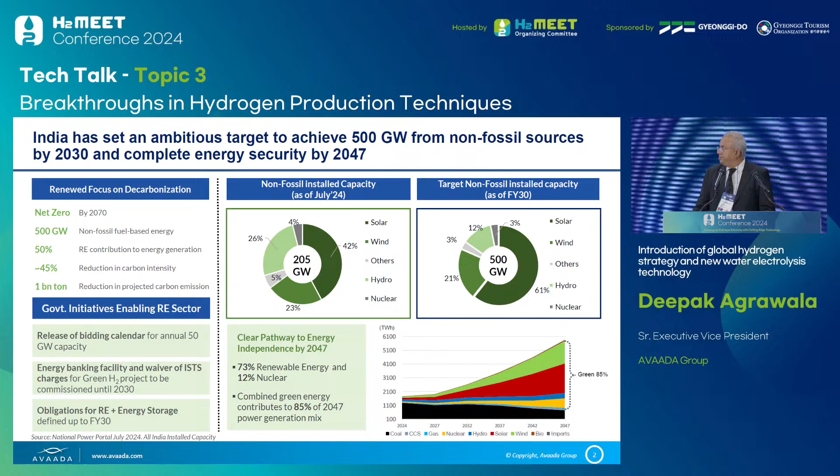A very important and unique feature that makes India one of the preferred low-cost destinations for production of green hydrogen and green molecules like ammonia is India's large and single unified transmission network. Until 2016, India used to be divided into 5 different regional transmission grids, but post 2017, the entire country has one single grid at one single frequency.

This allows us, as players and producers of electricity, to transmit our electricity over long distances to our green hydrogen and green ammonia plants. As a policy, we have also received an incentive of waiver of interstate transmission connectivity charges. So one single grid, one single frequency is one of the very unique features of India, and there are very few countries in the world with this distinction.

Not just in terms of transmission capability, but even in terms of availability and congestion, there is hardly any congestion in the grid, and the network is available continuously over 99.5% based on a last 10-year track record.

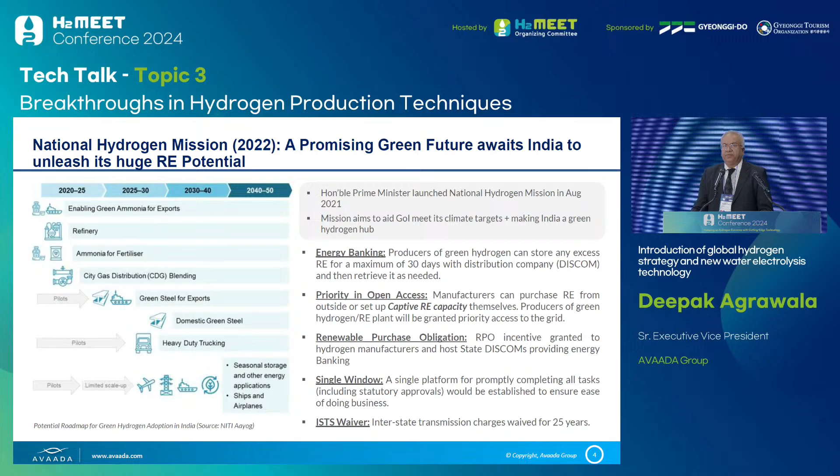The second important policy announcement is on the single window clearance and ISTS waiver. Effectively, once our projects are operational before 2030, we will get a waiver of interstate transmission charges for a period of 25 years. Both these policy announcements have set up an enabling environment for India to become one of the lowest cost producers for green molecules.

The Green Hydrogen Mission launched last year has given a clear target of about 5 million tons of green hydrogen production by 2030, which would incrementally mean about 125 gigawatts of renewable energy electricity. We would be one of the important contributors for the nation to achieve these targets, and we look forward to exporting a substantial part of this production to markets like Korea, where there is large demand to meet their own decarbonization targets.

Specific to Avaada, we are a player in this industry for nearly 13 years within the renewable energy landscape. We have set a vision to become a 30 gigawatt company by the end of this decade, supplemented by backward integration into solar PV manufacturing and forward integration into the green molecule business. We are environmentally conscious, and as a corporate we are proud to meet all the sustainable development goals set by the United Nations. Being a fully integrated green platform, we take these SDG goals close to our heart.

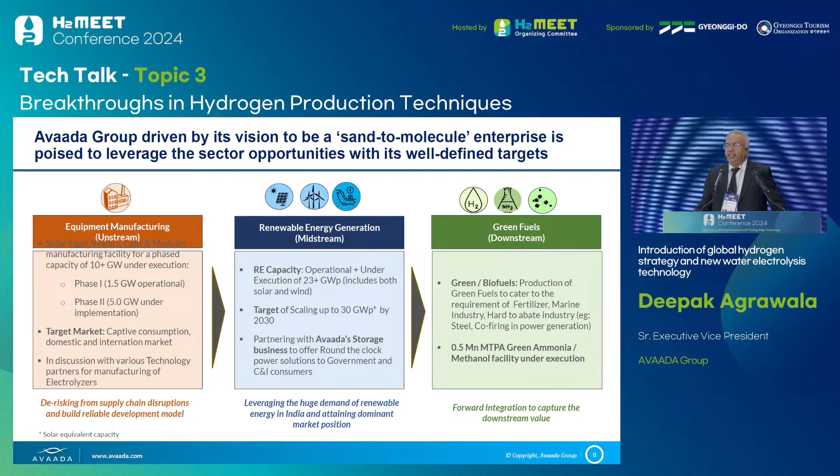This is our journey since our inception in 2009. Between 2009 and 2016, we were known as Welspun Energy in India. In 2016, we sold our business to one of our competitors in India, Tata Power. And we started Avaada again in 2017.

We have been very fortunate to have several firsts. We were the first in Asia and second in the world to start a 151 megawatt project back in 2013. And in 2021, we commissioned the world's largest single location solar plant of 1.25 gigawatts.

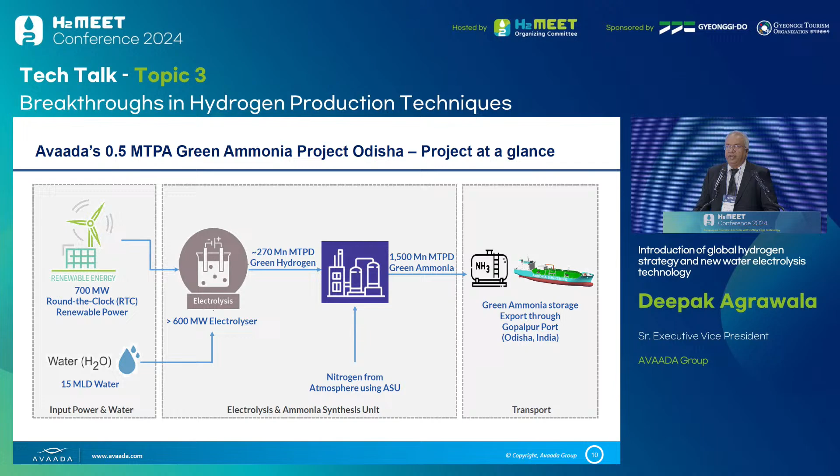Our intent is to set up this plant as well as have a port infrastructure in terms of storage and pipeline, and then ship the molecule to various customers, both in India as well as globally. And we are specifically targeting markets like Korea, where the CHPS auction is already underway.

So this is the location of our plant. This is the map of India. This is the state of Odisha, which is along the east coast of India, a very mineral-rich state where our plant will be located. This state has 3 ports, and our plant will be near to the Gopalpur port, just about 6 kilometers from the port boundary.

This will ensure that our domestic transportation is minimal, and the molecule can be easily loaded on the ships for shipment to various countries in the world.

And our renewable energy block will be scattered all across the wind, as well as some of the solar will be in Odisha and out here. So we can transmit the renewable energy thousands of kilometers, and that too without paying any interstate transmission charges, which is a policy incentive given by Government of India.

So with a combination of this, we hope to secure offtake and potentially set up these plants, with an estimated timeline of about 2028 commissioning. We have done a formal inauguration of the plant as well early this year by the Honorable Chief Minister, and all the various development activities are underway for the project.

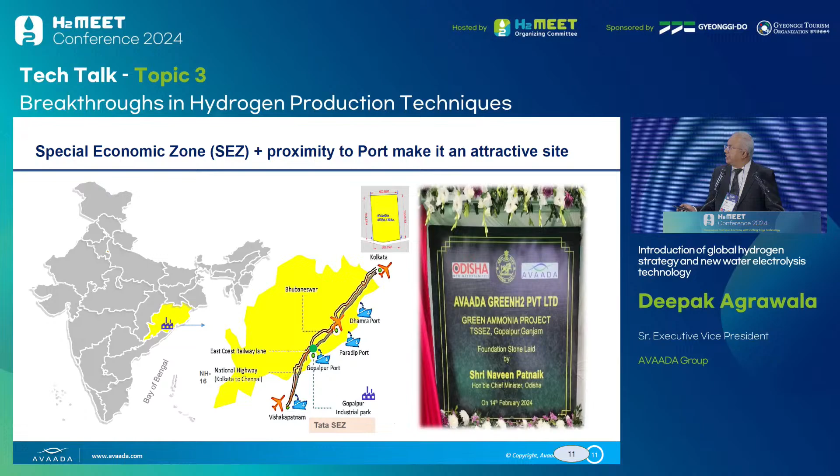Since we have assembled here to focus essentially on the hydrogen production technologies, I think there are multiple pathways through which various companies and various research institutions are trying to produce hydrogen. We being users of the technology, we essentially have narrowed down which are commercially available at large scale today, and which can also be available at a reasonable cost and within the timelines.

So in our first project, we are predominantly focusing on a combination of alkaline-based electrolyzers predominantly, and maybe have some smaller configuration of PEM-based electrolyzers. Because given our size, there are very few manufacturers in the world which will be able to supply within cost and within the timeline that we are looking at.

But we are very mindful of the fact that there are a lot of new technologies currently at development, at various stages of development in terms of their TRL level. And we are open for technology collaborations with any of the companies out here in Korea or in other parts of the world, in case they need some support, and Avaada can be one of the important players who can participate in that technology journey as well.

This is my last slide. So basically what we are looking out in Korea and some of the other demand markets, we have multiple opportunities that we can partner and collaborate with.

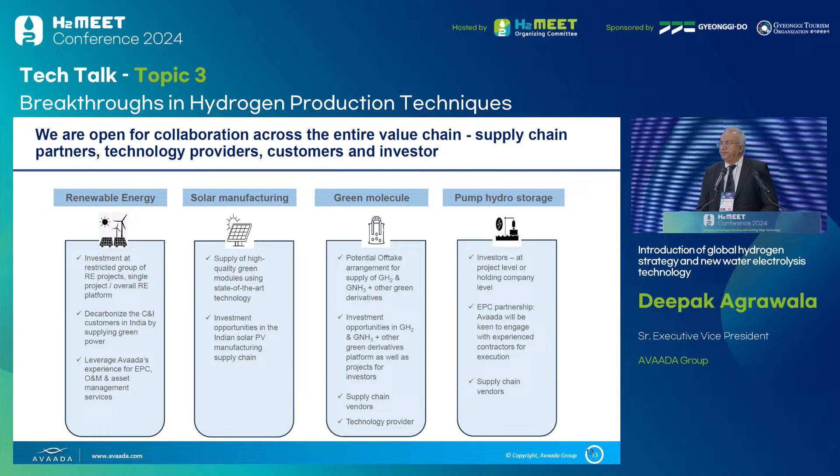Thank you. Thank you very much for your presentation.

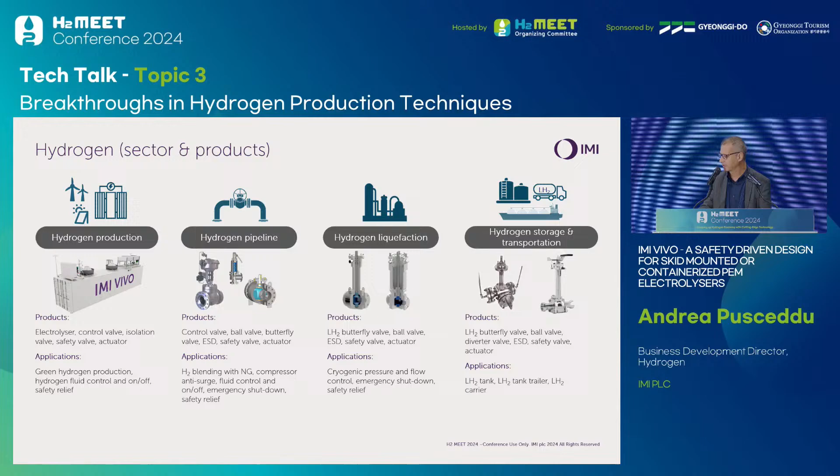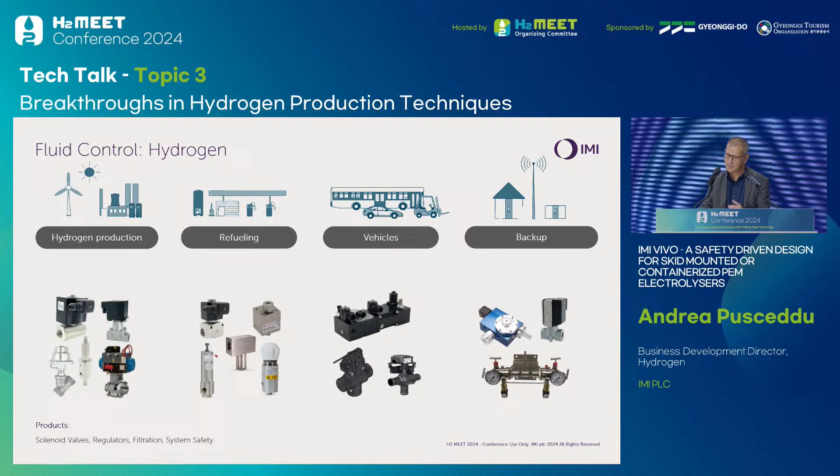For hydrogen, since we are here for hydrogen, we are of course in hydrogen production with our VIVO electrolyzer, and we will focus a bit on the electrolyzer. But we also have products for hydrogen pipeline valves, gas blending, compressor anti-surge, and general fluid control. We are also very active in liquid hydrogen products, so we have valves for liquid hydrogen, and also components for storage and transportation. More than this, we have components for our system platform across hydrogen production, refueling, vehicles, and backup. We have the priority panel, the back pressure control valve, everything related to components for high pressure hydrogen.

Now I will focus, as I said, on our PEM electrolyzer, which is the product that IMI is launching on the market with a very good reaction from the market. The product is designed and engineered in Italy, in our Remosa business unit, in a brand new facility that was just opened 2 years ago - 60,000 square meters indoor, where we have the production of our oil and gas products, because this company comes from the oil and gas sector. This is a very important concept I would like to convey: all the know-how, all the gray hairs we got from several decades of experience in very high challenging oil and gas applications is the same skill, the same approach, the same attitude that we are now using also for the new green technology related to hydrogen.

Here in the picture you see our beautiful factory. By the way, we are in Italy, in Sardinia, a wonderful island, and you should pay us a visit if you're interested in our product - and even if you're not, because in any case it's a fantastic place for tourism. You also see our assembly line for the electrolyzer.

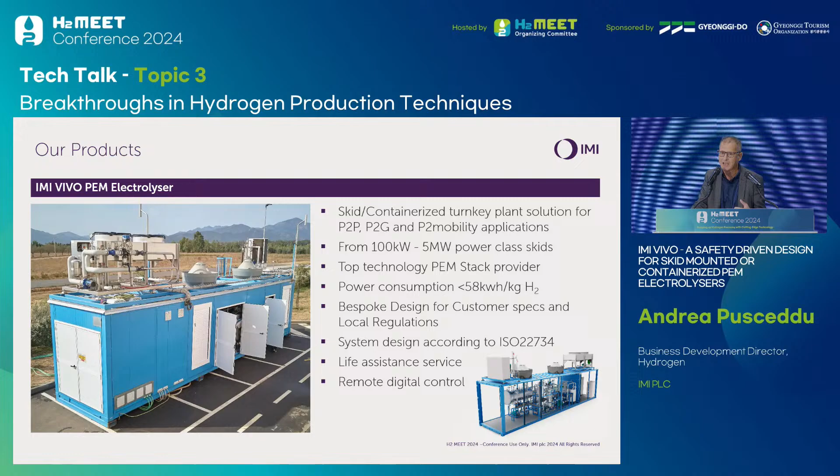So, in our booth, we are here at the exposition, and we will be happy to have you visiting our booth. You will see a fantastic model, very huge model we brought in a trolley from Italy, flying together with us, and you will see this exact model.

So our latest design is containerized, skid-mounted. The size is not a standard ISO container; it's slightly longer than an ISO container and slightly taller, but this second iteration of our design is specifically meant to make the life of the end user and the installation very easy, even for some aspects.

You can notice that, differently from other designs, this electrolyzer, this container—let me say, the enclosure—doesn't have any equipment on the top. This is because if you put fans, if you put coolers on the top, then you will need to do maintenance there. So you need to climb there, you need safety authorizations, safety regulations. Speaking with the customer, we understood that this brings issues, so there is nothing on the roof of our electrolyzer, because everything can be maintained very easily from the sides.

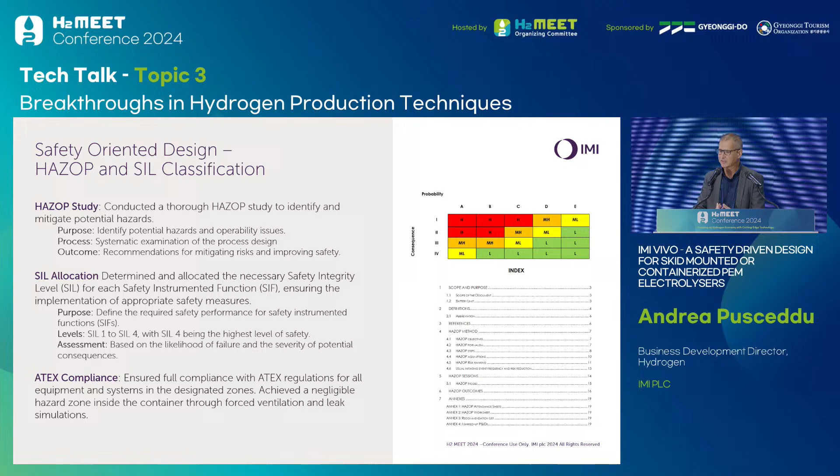In the remaining few minutes, I just want to show you some other types of studies. Again, those are high-end engineering techniques which have been used successfully in different types of oil and gas applications.

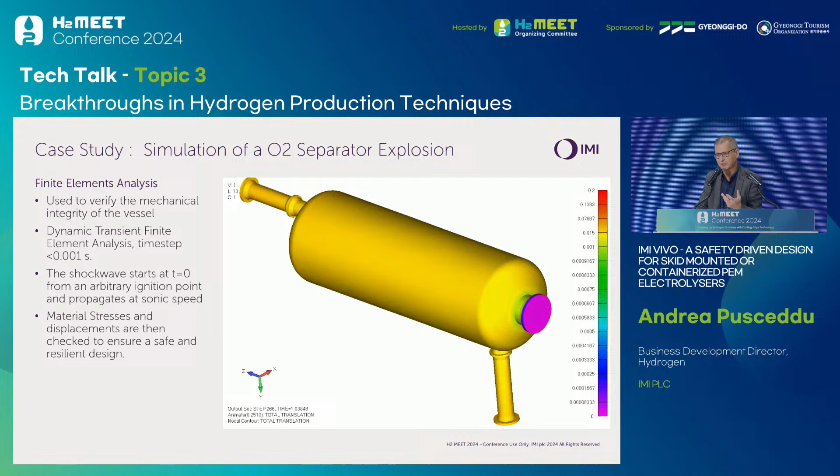This type of analysis simulates the propagation, at sonic speed, of a spherical shock wave starting from an arbitrary ignition point inside the vessel, and can analyze the stresses inside the vessel, allowing engineers to visualize how the structure reacts, and also to visualize the stresses and the points of concern for the design.

But there is more than that. As I told you, in our latest revision of the design, we moved the fans away from the top, for better safety during maintenance, which is an important aspect. Every time we design something, we also think about who is going to maintain the system.

We have ventilation fans that are used to vent out and completely remove the hydrogen from the internal enclosure. But to what extent is the location of the fan correct, and to what extent is the power of this fan okay, and how much time do we need to vent? That is important information that goes into the safety analysis.

In order to avoid any arbitrary assumption, what we do is perform a high-end, quite sophisticated type of analysis, a multi-species analysis that takes into account the different physical behavior of hydrogen compared to air, and takes into account the power and the effects of the fan.

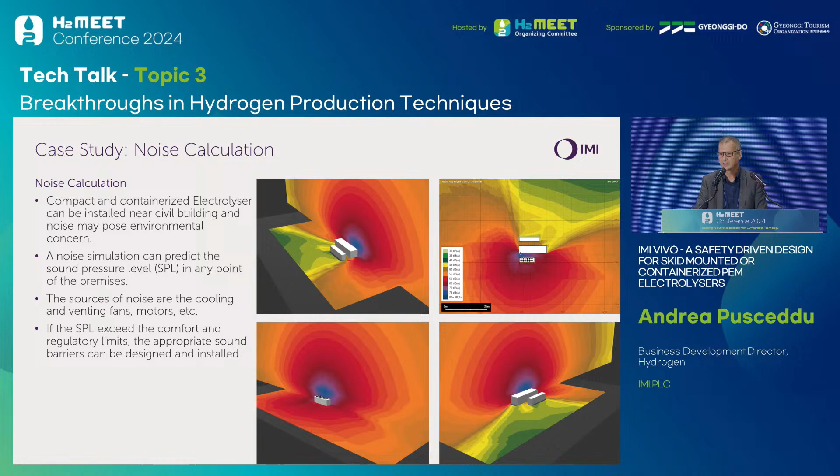With this type of solution, we can simulate exactly in the planimetry, in the map, where there is the actual location, taking into account building, walls, and protection, what are the noise levels, and we can give the proof and the confidence that the noise levels are accurate.

Some few references: we have now a commercial backlog of around 14 megawatts that we will manufacture by end of this year and end of next year. So the business is doing very good.

The first two customers we would like to mention here, because they believed us years ago when we started, are the Translational Energy Research Centre in Sheffield and the IAAPS in Bath, two labs which are doing advanced research on hydrogen and are using our 500 kilowatt electrolyzer.

In conclusion, IMI VIVO is a new brand of a very large company, but what I would love you to remember from my speech is that everything is built upon 40 and probably more years of experience of challenging, real applications. We have thousands of valves which are operating right now everywhere in the world in safety, and we are using the same paradigm and same approach in the electrolyzer.

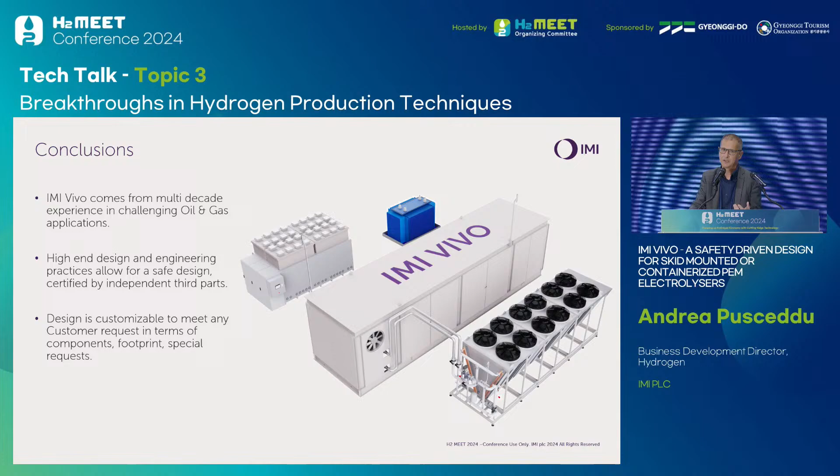We are at the booth, and we would like you to pay us a visit and come speak with us, because we can speak your language. Literally, we have a Korean office, but we can speak the language of the customer in terms of understanding needs and providing solutions which are cost-effective, professionally made, and guaranteed by our experience. We are at booth G24. You will note immediately, because we are the only one purple. It's very easy to spot. It was a pleasure to be here, and it will be a pleasure if you can meet us at the booth.

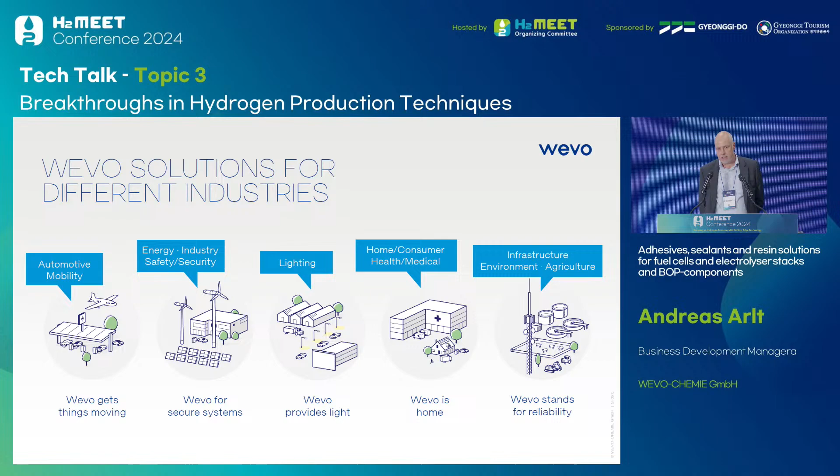So I have a few examples brought with me. I'll talk about 2 component materials which have to be mixed, more on that later. They are used, for example, as sealant and gasketing material for metallic and also for graphite polymer compound bipolar plates. This is one of the main applications. You see a metallic bipolar plate in the bottom picture.

These materials are also used as sealants for the membrane electrode assembly, or the GDL. Then we have adhesives for joining the GDL, or the porous transport layer, for electrolyzers onto the bipolar plate. Very important, we have adhesives for joining the monopolar plates to form the bipolar plates - that's essential for graphite bipolar plates. We also work on adhesive solutions for metallic bipolar plates as an alternative to laser welding, and these materials allow new stack formation technologies and give you more design freedom.

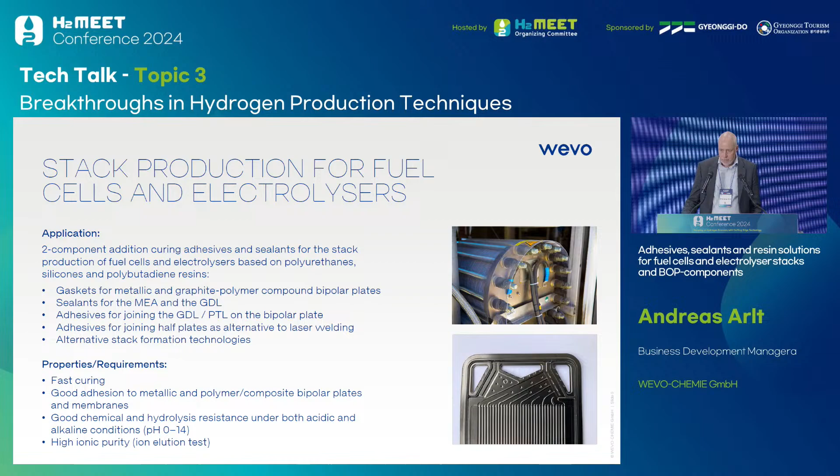If it comes to the requirements and properties, the materials, of course, must cure very fast - I'll cover that later. They must adhere to the materials very well, and they need good chemical and hydrolysis resistance, depending on the electrolyzer or fuel cell type. They must be resistant under acidic and also alkaline conditions, and they must be very pure: low in ion content and low in volatile organic compounds.

If you look into sealing or gasket technologies, we have basically three different technologies used today for fuel cell stacks and electrolyzer stacks. First is the use of pre-manufactured, pre-formed gaskets - O-ring types or flat gaskets - done by manual or half-automated assembly. We do not make these materials. Our materials are in the second category: liquid cured or formed-in-place gaskets.

That means the material is applied by either a dispensing or a screen printing process directly on the bipolar plate. This is a very fast process. The third possibility is a kind of injection molding with thermoplastic elastomers, for example FKM based or rubber based, typically on the membrane electrode assembly. We do not really do that, so we really focus on the second part.

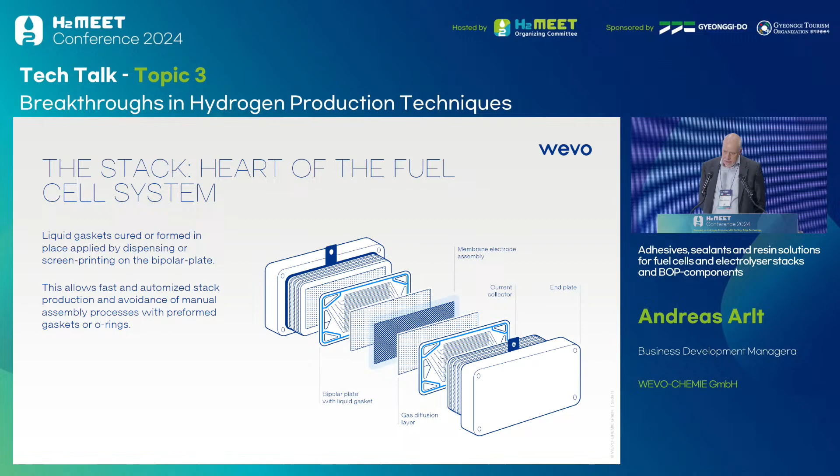As said, these materials are applied by different technologies and allow good automation of the production process of stacks, and also allow you good design freedom.

I come now to one of the chemistries, polyurethanes, what we have for this application. As said, we can adjust here the mechanical properties from very soft to rigid. They are high in ionic purity, and have very good adhesion on many substrates. If we adjust them soft with a low glass transition temperature, they can act as a sealant and adhesive at the same time, and they may replace silicone elastomers.

Why do I say that? Because we also have silicones, and I will talk about that later, but one of the advantages of polyurethane is the much lower gas permeability, and that includes hydrogen as well - I'll talk about it later. We can adjust the viscosity of these materials from low viscous to really high viscosity thixotropic, to apply beads, and the reactivity can be adjusted as well.

I don't want to spend too much time on that, but it just shows you some examples of our materials. On the left side, a low viscosity material - it's a material with high resistance in alkaline electrolytes, so it's a possible sealant material for AEM and alkaline electrolyzers. In the middle, it's a version of the left one, a thixotropic version, higher in viscosity, but basically the same chemical basis. And on the right side, there's another material, a little bit softer.

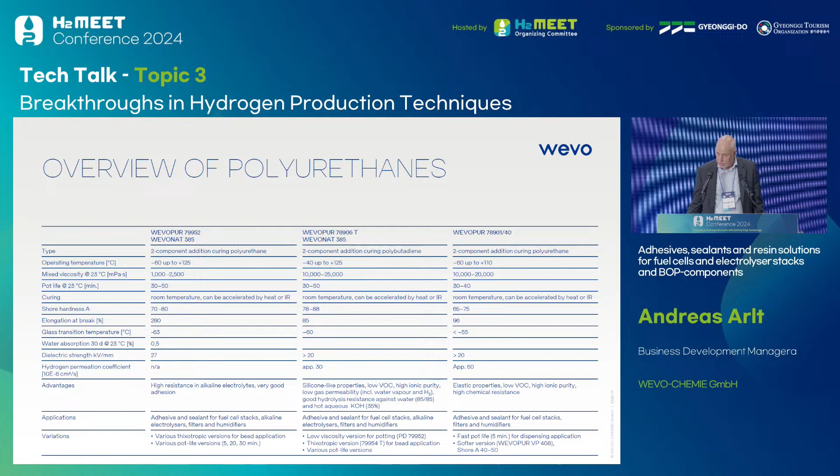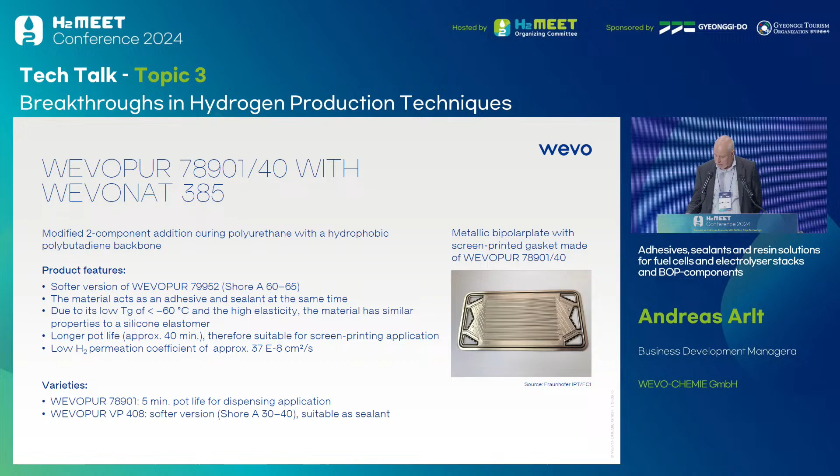I talk about that in this slide - look at the picture here. You can see the black gasket on the metallic bipolar plate. In this case, this was applied by a screen printing process. This material is really low in gas permeability - we have measured that - and it's a silicone-like material. It's also available in different versions, with reactivity and also elasticity available in lower elasticity.

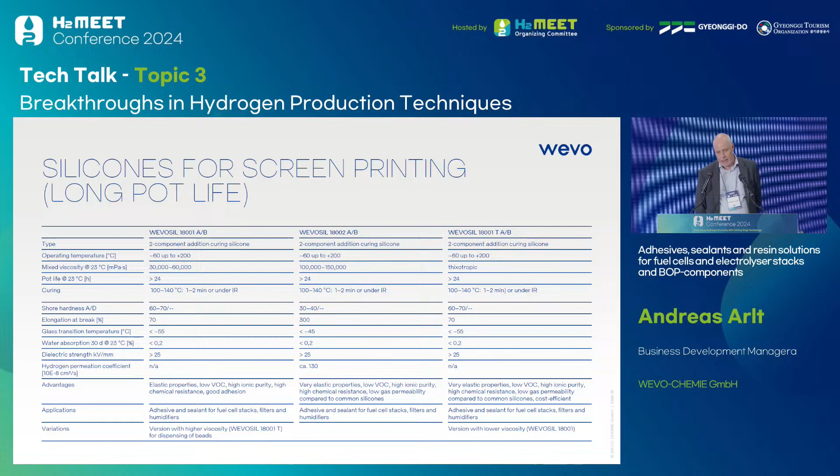These are versions with a longer reactivity at room temperatures. We have made them as modifications of the material you saw before for screen printing processes. They have a long pot life at room temperature, but then react very fast if you apply heat. You can do that in a convection oven, but also by infrared heating or by laser heating.

This is the other material I explained, the softer material with the higher viscosity. You see the same bipolar plate here on the bottom picture, but in this case with a catalytic coating on top, and the gasket in black. It allows you to apply higher beads and higher gasket height. The upper picture I show later when I talk about the application method.

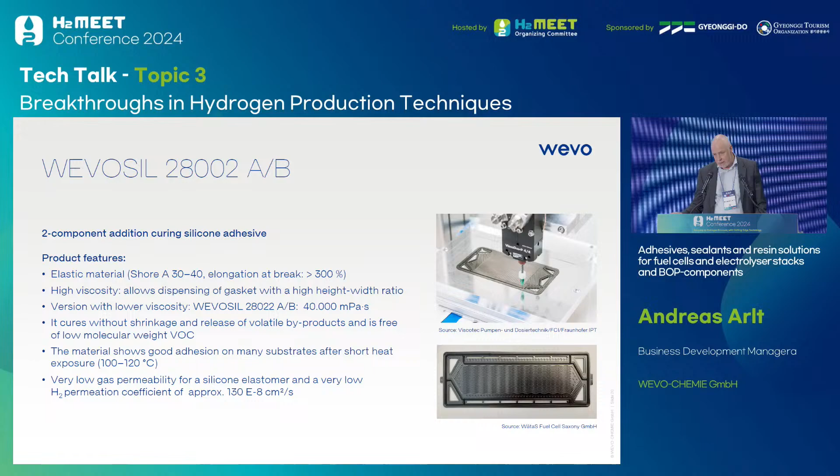This material was especially modified in terms of reducing the hydrogen permeability. As said, silicones have a high gas permeability, but this material is rather low in hydrogen permeability.

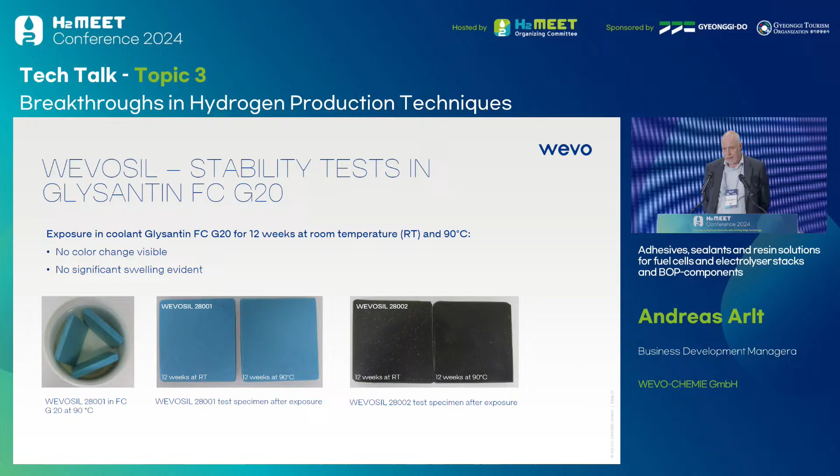I want to spend a few words on the epoxy adhesives. We made these materials for assembly of alkaline electrolyzers, because this material is really very resistant in alkaline electrolytes, so in hot potassium hydroxide solution. It has very good adhesion on many substrates, for example nickel and titanium, which is also not so easy. In a low viscous version, as shown here, it's suitable as a potting material to make flow frames, for example. And in a thixotropic version, as WEVOPOX VP414, it allows you to apply adhesive beads.

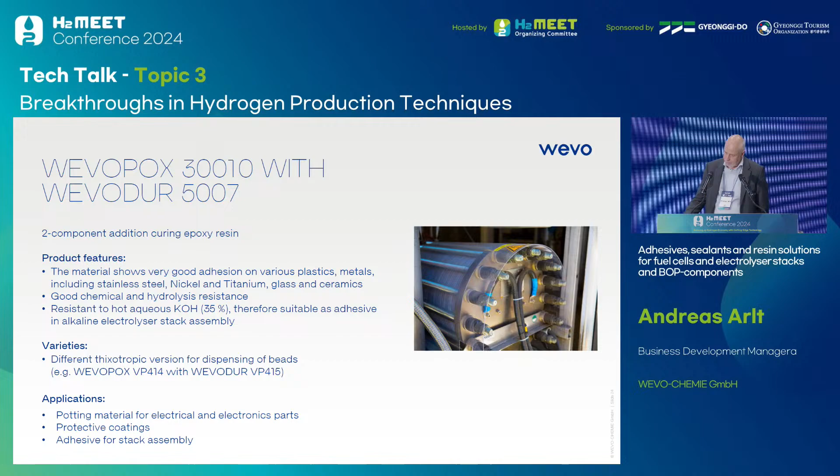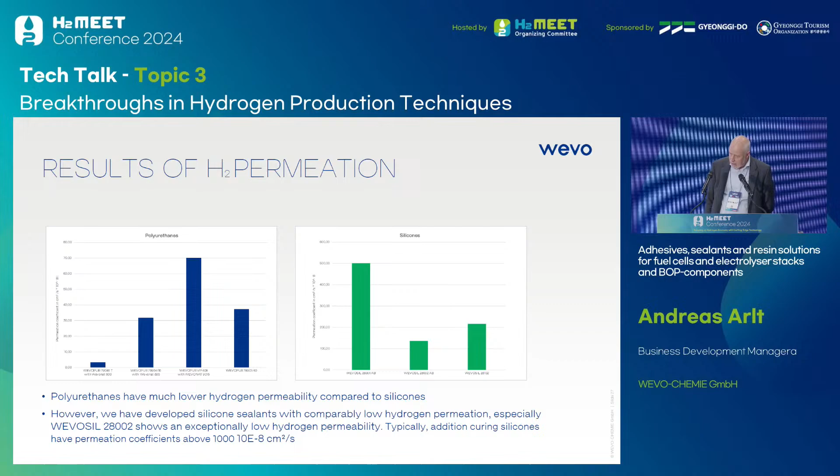I come to the balance of plant applications. These are basically also adhesive solutions for the production of different filter systems, and especially the humidifier modules used for fuel cell systems. The requirements are quite similar, and also the properties. That's why we also typically use the same materials as I showed you before for the fuel cell stacks.

With the exception of humidifier modules not made with flat membranes but with hollow fiber membranes. There are a couple of companies here showing that, where the hollow fiber bundle has to be encapsulated or potted at both ends in a tube, and we do that with suitable potting materials, for example based on polyurethane.

And then finally, some words on the power electronic devices where our materials are used, for example, for DC-DC converters, the electronic control unit of the fuel cell system, or the onboard charger. Here our materials are used typically as thermal interface materials or as thermally conductive potting materials, for example, for the power electronic device, and also the inductive components, the chokes and the transformers used in the devices shown here. These typically are flame-resistant, UL-approved systems.

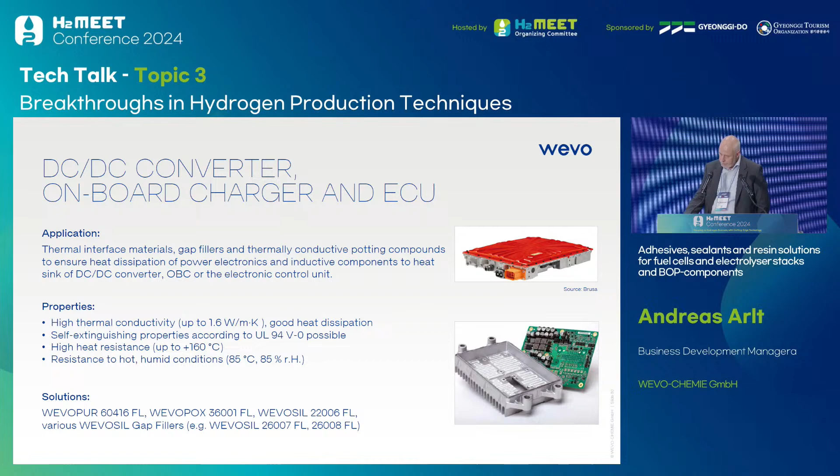As said, we are working on solutions especially for the silicones, for screen printable materials. For the polyurethane, that's at the moment a big challenge. And then we also look into liquid silicone rubber formulation, as said, for the injection molding to be done directly on the membrane electrode assembly.

The materials are principally room temperature curing, but it would take too long, so we apply heat, and as said, we can do that either by convection ovens or by near infrared heaters. And we have a research project going on with the Technical University in Aachen, where we use laser welding. And this is a very fast process.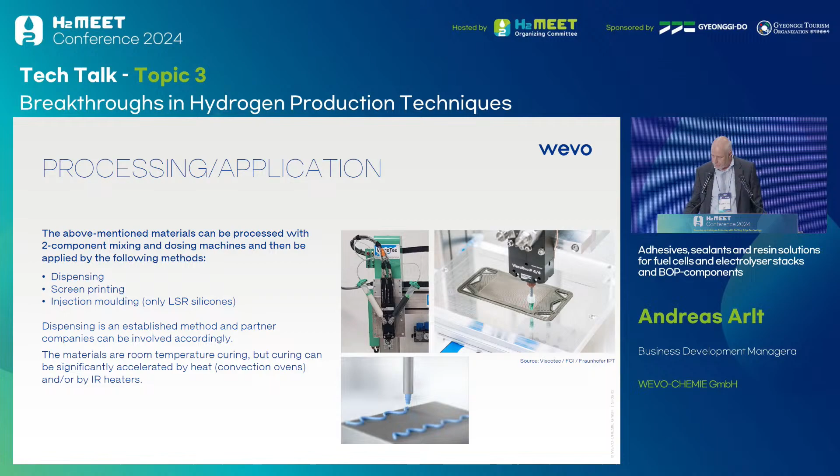With that, I already come to the end of my presentation, in time, I see. I hope I could show you that we developed new techniques to apply the sealing or the gasket on the bipolar plate, which allows also better stack design and more design freedom. And we focused especially on materials with a low hydrogen permeability. As said, polyurethanes are versatile materials where you can adjust the mechanical properties in a very wide range, and they can be used as sealant and adhesive at the same time.

As said, the polyurethane materials have a low gas permeability, but at the end we found a solution for the silicons as well, especially with the WEVO seal 28002 grade. With that I'm finished with the presentation. I thank you for your attention, and please, if you want more information, I have some nice brochures here where everything is described, and you can also come to our booth B700 in the battery part of the show.

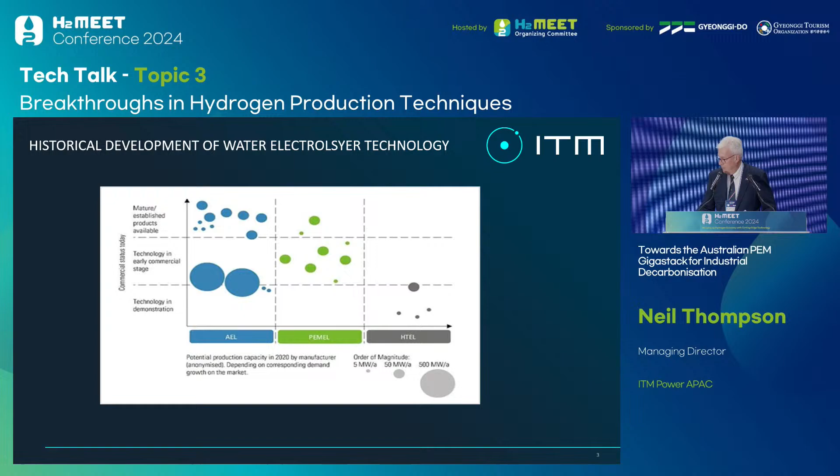In terms of future efficiency improvements and future cost reductions, we're about at the level of technological development for PEM. Now we're looking to solid oxide and potentially AEM, and the aim is to basically meet the current parameters for alkaline.

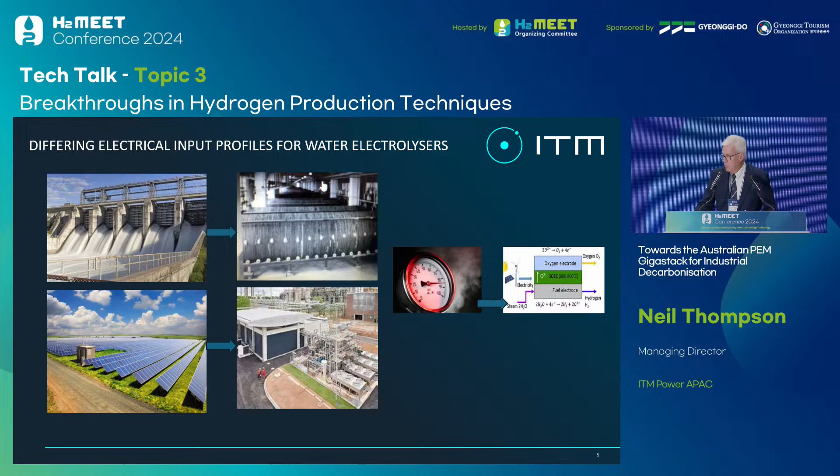In terms of the different types of electrolyser technology, they're each suited to different types of renewable electrons for input. The traditional alkaline electrolyser is best suited to steady-state hydropower, which was the first example I showed you from the 1950s, whereas the PEM type, which we're currently working on around the globe, is best suited to variable renewable energy from solar and wind. And next we have the solid oxide type, which is best used in industrial situations where we have waste steam.

Our journey in Europe in terms of scale-up of electrolysers started at 2 kilowatts in around 2002, and we've scaled up now to 200 megawatts, which is the RWE project in Germany, based on the Wuppertal Institute's Factor 10 approach, where we're always taking a by-10 improvement, so going from 2 kilowatts to 20 kilowatts, etc.

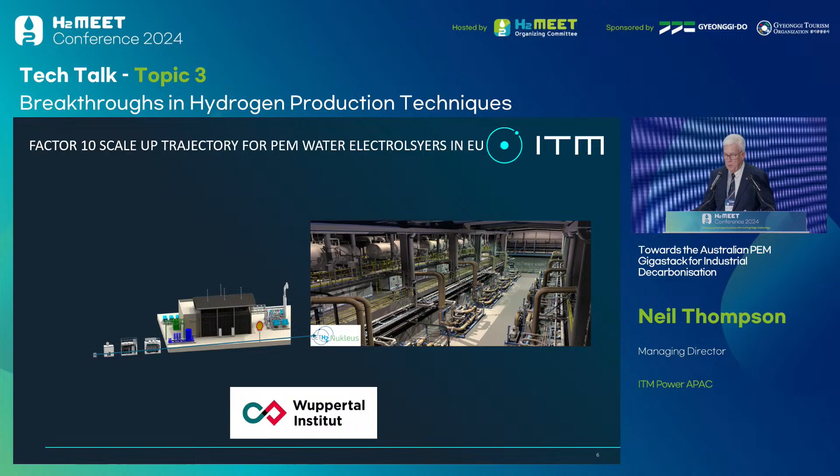In terms of our experience in Australia, our first 4 electrolyser units in Australia were from the 0.2 megawatt unit up to the 2 megawatt unit, so that we could actually get experience with local codes and standards, and also to develop an after-sales team, which is very important in a large country like Australia.

Since 2023, we formed a joint venture partnership with Linde Engineering as our EPC partner, and we also received a 20% injection of capital from Linde Gas AG. Now we're working exclusively to bring Trident electrolyser stacks into Australia and combining this with local external balance of plant to get to at least 30% local content. That's up to the 200 megawatt scale currently, through to 2028.

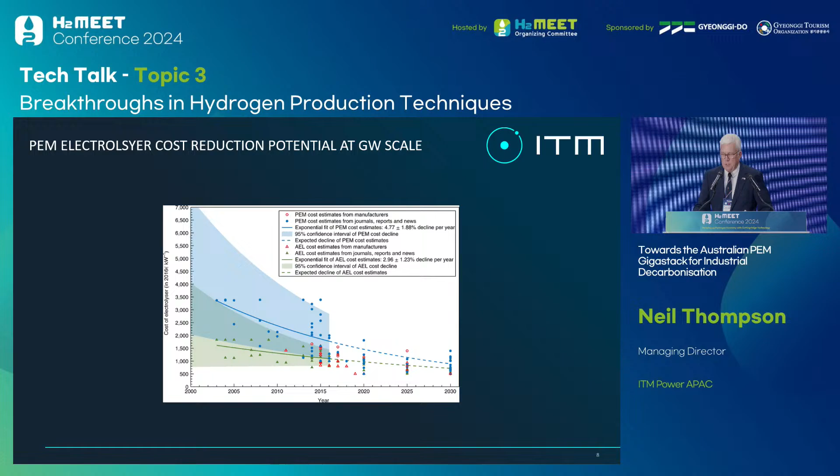By 2030, we're hoping to work with our Korean partners to achieve the gigawatt scale. In terms of electrolyser costs, over the last decade, we've received information to show that we've reduced PEM electrolyser costs by 50%. By moving to the gigawatt scale, we're moving to another 50%. So the aim is to achieve the same cost reduction over the next 5 years.

Now, the lessons learnt from those 9 projects in Australia - one of the key things we've learned is that this is not about hydrogen versus batteries. This is about integrated sustainable design. This is about the 2 technologies working together to achieve a 1+1=3 outcome. And basically we found that hydrogen is certainly not the Swiss Army knife of the road to net zero. It has to work with other technologies.

Now, one of the key things we've learned in these projects as well is that the cost of input electrons constitutes up to 70% of the dollar per kilo cost of the produced hydrogen. So it's critical to find low-cost sources of electrons, which Australia is blessed with in terms of PV and wind utilisation factors.

One of the other things we've learned from our lessons in Australia is that we must have multiple offtakes, a portfolio typically from mobility, power generation, whether using a gas turbine or a fuel cell. I've met many wonderful fuel cell manufacturers in Korea this week. We also look at waste heat, something not often considered in electrolyser projects. We can use that waste heat directly for water cooling via an absorption chiller, and also for developing hot water for domestic applications.

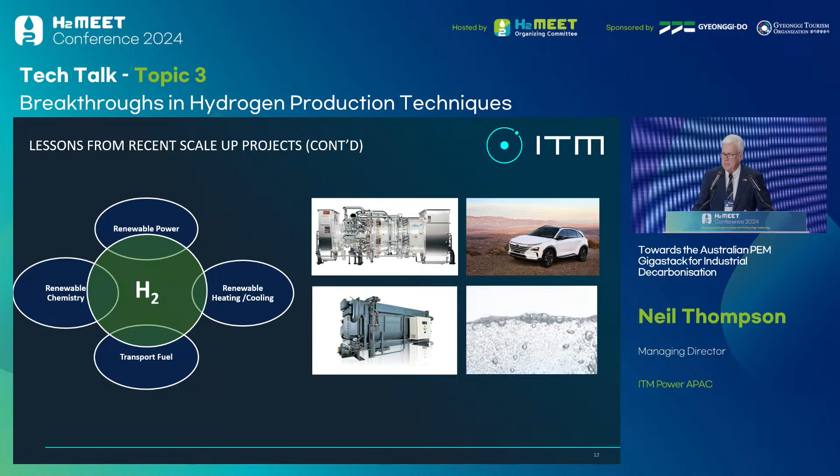Finally, we have renewable chemistry. One of the unsung heroes of projects is basically oxygen, so we're looking at how we use that in both industrial and future medical applications.

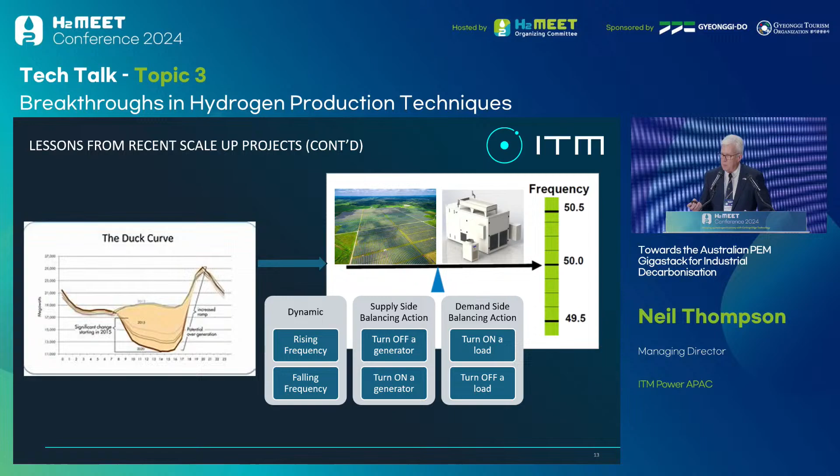One of the other great things about PEM electrolysers is their ability to ramp up and ramp down very quickly. In Australia, like the US, we have a problem with the duck curve. During the day we have low cost, zero cost, or even negative cost electrons, so we turn the electrolysers on quickly to take advantage of that. Then when the grid comes back on for the evening peak, we turn them off quickly. So we earn money in Australia, like California, from demand response and frequency control by turning PEM electrolysers on and off. Those incomes from frequency services and demand response can actually improve the IRR for electrolyser projects.

One of the things we've learned is working with our various state governments in Australia, local CRCs or cooperative research centres from our universities, and also local hydrogen hubs put together by the private sector and typically local government.

A good example of this is the work that my host here this week, Mr. Kyu Hong Lee of Alexseed, is undertaking with his team in Australia, headed by my good friend Mr. Robert Saunders and his able-bodied assistant Mr. Justin Werner, working with major clients such as the Hallett Group on world-class green cement projects in partnership with Korean developers, including KHNP.

We've also found an opportunity working with the Industry Capability Network in Australia under Net Zero Manufacturing's EAD program, to look at local supplies of power supply units, but also critical balance of plant such as cooling systems, deoxy dryer units, and water reverse osmosis units. This reduces the cost per kilowatt for the total system, while also reaching 30 to 60% local content, which is often needed for projects with government procurement.

One of the exciting things we've discussed here in Korea this week, I've taken my host Mr. Kyu-hong Lee to the UK Embassy. The UK government is offering 20 billion sterling for funding clean tech manufactured projects from the UK, including ITM. In essence, this enables us to take the cost of projects off the balance sheet and move it to the profit and loss statement as an OPEX.

The shift towards a decarbonized society is accelerating. H2 represents hydrogen and humanity, the two main pillars of Hyundai's hydrogen business, leveraging the group's wide-ranging capabilities in various sectors beyond automobiles. Hyundai's H2 vision spans across the entire hydrogen value chain, from production to its utilization across industries. Hydrogen fuel cell technology brings significant advantages, like extended range and fast refueling capabilities. The HTWO fuel cell system, created through more than 27 years of research and development, represents Hyundai's commitment to creating a new wave for a hydrogen society. Clean energy based on hydrogen, paving the way for a sustainable future.

When you think about net zero aspirations, you need lower carbon systems that can work in the process and the heat that we need to work with. Hydrogen, from that perspective, is a very versatile molecule in the energy transition. It has applicability in the transport sector, especially in heavy-duty transport, where we can use it with existing combustion engines or with fuel cells. But it can also be used as a direct combustible fuel in industrials like cement and steel. These are big investments, and they offer big potential for lowering risk and carbon intensity for all kinds of consumers and companies. Chevron is uniquely positioned to lead the way forward. We're a fully integrated energy provider enabling new energies for a growing world. And because we are Chevron, we have an opportunity to lead the way.

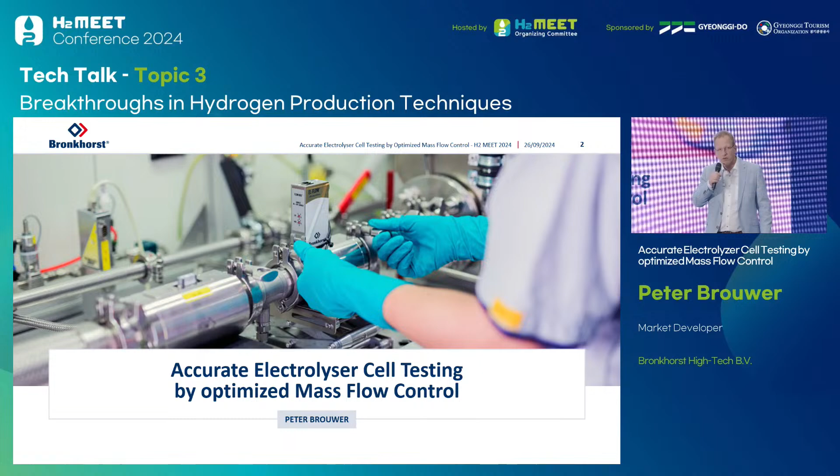First, let's introduce myself. I'm market developer for renewable energy. That means that I travel around in all the world to see what's happening in the renewable energy market and to learn what applications could be fit to Bronkhorst. I have an academic and research experience background. The last 10 years I worked in the Han University of Applied Sciences in Arnhem in the Netherlands. And before that, I have also industry experience in developing mass flow controllers and pressure controllers.

So when we look to the products of Bronkhorst, we have mass flow meters and controllers for gases and liquids, pressure meters and controllers, and also vapor delivery systems. And we also offer customized solutions if you have special needs. We call ourselves the low flow specialists. We offer products for the low flow range, especially for testing applications, R&D, and small systems.

We are in many markets, like, for example, the analytical market or the food and beverage, and all those markets we sell our products. But we have special interest in the renewable energy market. We believe that the renewable energy market is important also for everyone to have a green future.

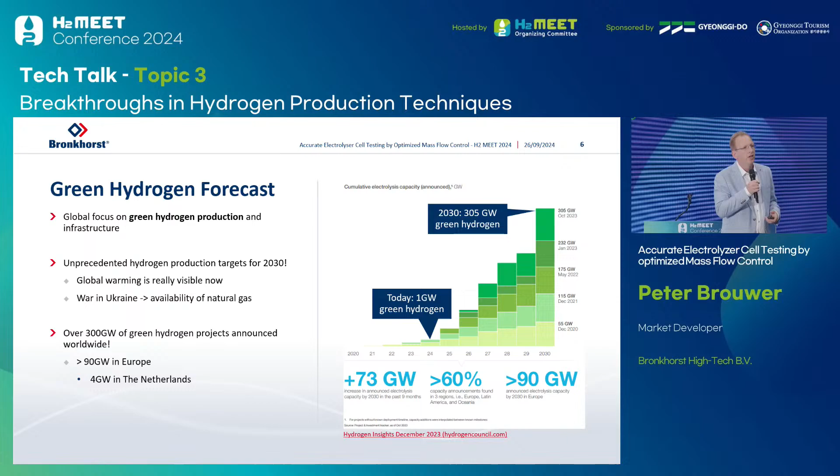We need to find new ways to handle that, and hydrogen is one of the solutions. Of that 300 gigawatt, 90 gigawatt is announced in Europe and 4 gigawatt in the Netherlands.

We have a slower start, and this is what we see in 2024. Projects are delayed, especially when I look to Europe, where we are situated. We see that the market is too volatile, that capital costs increased enormously, and materials are more expensive.

And the electricity price is higher than expected. We see that there is also a delay in subsidies and regulations. If you want to build something, you have to wait for the governments to approve that you can do that. And there are technological challenges - I want to focus today on the technological challenges. And the question is, is there still a business case?

For example, when you look to alkaline, which is the most ready technology for electrolysis, you see some things - I don't say it's dependent on which manufacturer and which type exactly - but there are some problems in H2 crossover, corrosion in the system, safety issues, the efficiency is not as high as they want it to be, and also the lifetime of those systems is not long enough for investors to invest in those systems. It is not ready yet.

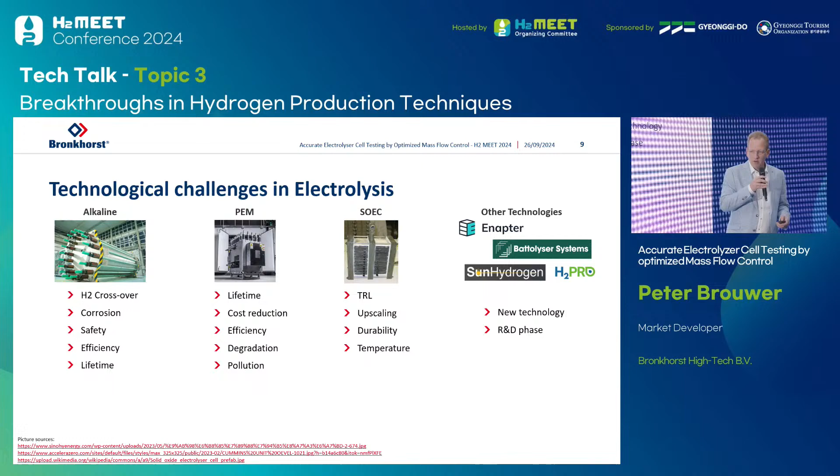For the last, I will show that there are also other technologies. AEM was also mentioned in one of the previous talks. Enapter is here with a booth. You can see that there are different other technologies, but those technologies are really new - a lot of them are in R&D phase. So my conclusion is that there is a high demand for test systems for electrolyzers.

And when you look to an electrolyzer system, the core of an electrolyzer system is a stack. And the typical test system is just a balance of plant around such a stack - but a special balance of plant, where you can measure everything you do during your test, because you want it to be possible to reproduce your test and for your results to be reliable.

If you look to such a system, it consists, of course, of the part that produces hydrogen. I made a picture like this, where I show that in the first part, the hydrogen is separated from the water - then we have a water separator step and a valve. On the other side of such a test system, we have the oxygen exhaust and also the water separation from the oxygen.

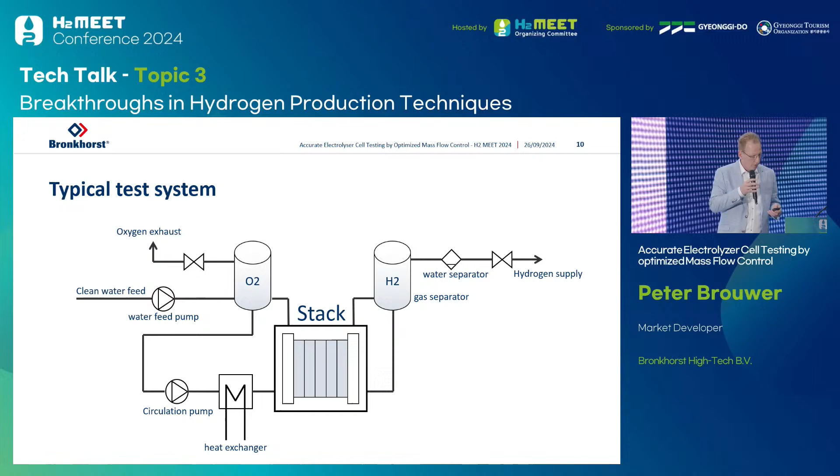And of course we have the input of clean water with a pump and a circulation system to circulate the water in the system. And dependent on the technology, this is an electrolyte like KOH in alkaline, or it is pure water in a system. And in a PEM system, you also need, for example, to add water vapor to your system. So this is what we call a balance of plant.

In this balance of plant, you need a lot of instrumentation. For example, if you have an electrolyzer system, you want to pressurize the system, because after this system you need to store the hydrogen - you need to go to higher pressures. So it would be nice if your electrolyzer can run at high pressure, so you need a back pressure controller.

But for example, in alkaline systems, it is important that the pressure difference between the oxygen and the hydrogen side is not too high. Because when this pressure difference is high, you get crossover of hydrogen to the oxygen side, which causes unsafe situations. When you have more than 4% of hydrogen in oxygen, you have a flammable mixture.

You can add a flow meter to your liquid circulation system, making it a liquid flow controller. Also, your clean water feed can be controlled with a flow controller. And at the end of the system, you can add a flow meter to measure the hydrogen flow that you produced. What I'm missing still is the electricity source.

You need to put electricity into the stack to let it run. And you can measure the current with a current sensor, so you know how much current is flowing to your system. What is nice about the relation between current and the flow meter is that the current you add here is electrons. The current sensor counts electrons, and your flow meter counts molecules. I will go into that deeper on the next slide.

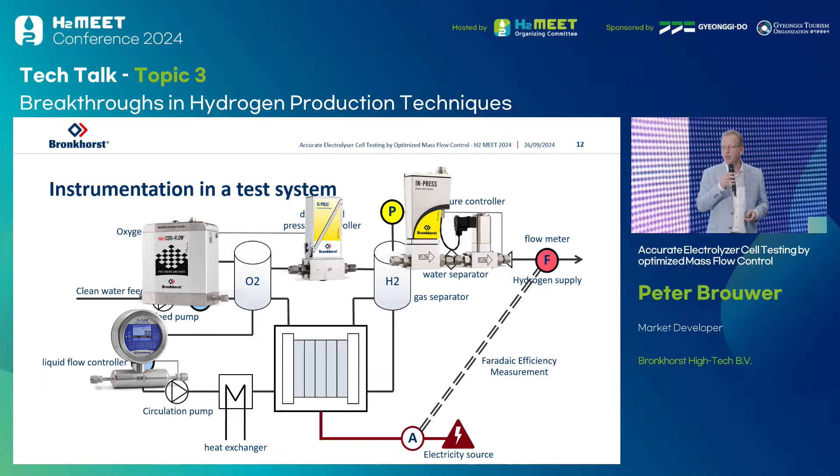We have Coriolis-type flow meters that you can use for your clean water feed. And, of course, we have thermal sensors to measure the hydrogen flow. Instead of the large thermal flow meter shown here, you can also use a Coriolis type of flow meter. But a Coriolis type of flow meter has a lot of pressure drop, and the advantage of a thermal one is that you don't have that pressure drop. But what is important is that that flow meter is very accurate.

The reason why it needs to be accurate is because you want to measure the Faradaic efficiency. If you count electrons of the current flowing to the stack and compare it with the hydrogen produced, there is a strict relation between them. You need two electrons to produce one molecule of hydrogen. This is called the first law of electrolysis of Faraday. So if you can measure the hydrogen flow very accurately, you can see if there are internal leakages in your system, where hydrogen is going somewhere else, by comparing the current with the hydrogen flow.

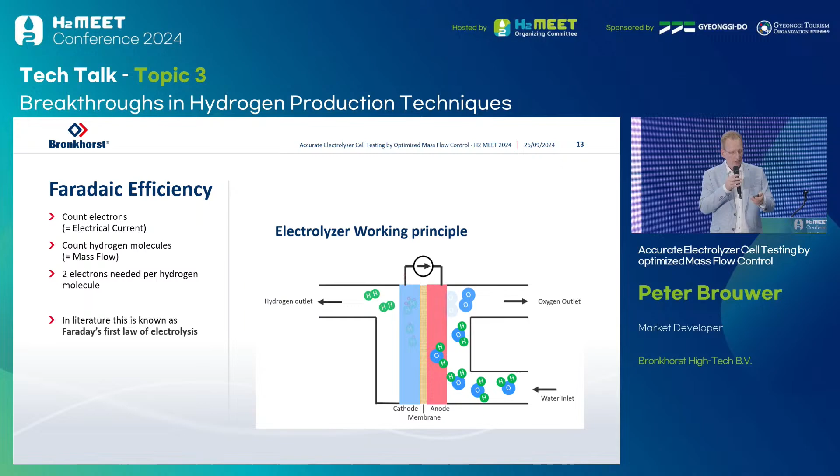So for the hydrogen flow meter, we have set up some specifications. It should be at least 1% accurate or better, and this means you need a real gas calibration. Normally, thermal instruments are calibrated with a surrogate gas, like nitrogen, or with air, but here you need a real gas calibration with hydrogen. The pressure range of such an instrument is somewhere between 10 and 60 bar, and you want the pressure drop as low as possible.

Sometimes you also need explosion protection for zone 1 or zone 2, which we can also offer. And the flow rate I placed here: if you have a 1 megawatt stack, you have a flow rate of around 200 cubes per hour of hydrogen.

Now the next slides are about an invention of Bronkhorst: how to calibrate such high flows. The traditional way is to start with a bunch of bottles of hydrogen and a device under test, your flow meter, which you want to calibrate and compare with a reference meter. That's fine for low flows, but for higher flows, like 1,000 cubes per hour, is it okay to vent it into the air? We say no, because you create an explosive, unsafe environment by adding all that hydrogen into the air. It is not good for the world. Hydrogen is an indirect greenhouse gas, and it is also expensive. It costs a lot of money to calibrate a flow meter this way, for example at 200 cubes per hour.

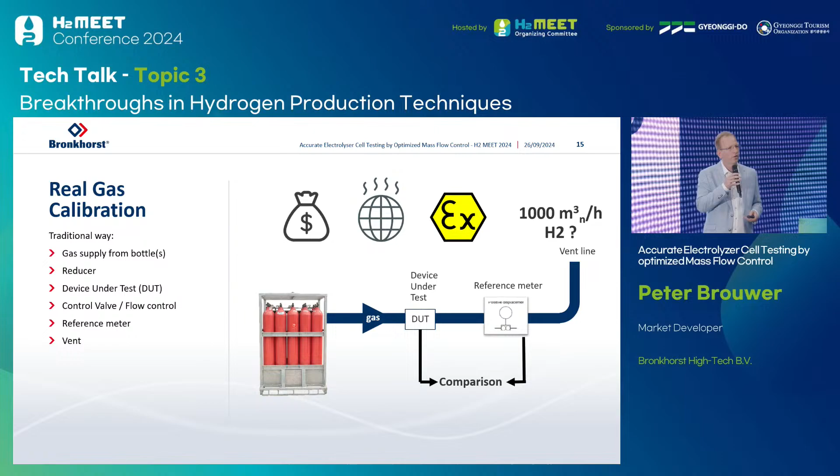So what we did was make a loop calibration system. We closed the loop and reused the gas in a closed loop. We use a pump to pump the gas around. We have some temperature control in the system, and our device under test and the reference meter are placed inside the loop, where we do the comparison.

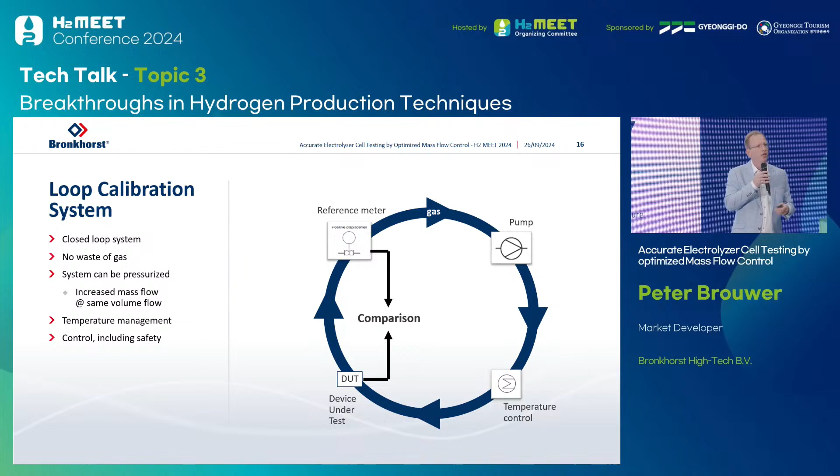So if we look at the relation between the power of an electrolyzer and the flow rate of hydrogen you produce, you see something like this, that we can cover now with the real gas calibration flows up to 20 kilograms per hour or 200 cubes per hour of hydrogen. And in the future, we want to build an even larger calibration loop for calibrating hydrogen instruments.

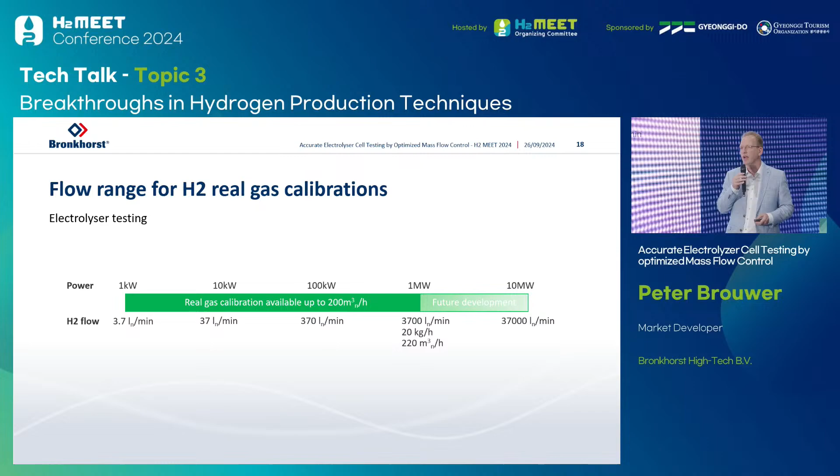So I will come to the conclusion of my presentation. There is a strong focus on green hydrogen production via electrolysis. We see in the world that projects are delayed, and one of the reasons is technical challenges. Therefore, test systems are needed. In those test systems, you need the most reliable test results, and therefore you need very accurate, real gas calibrated flow controllers. Because of this new invention of the real gas calibration system, our instruments have a next level of accuracy for H2. With these improved instruments, your test systems will also be improved. Thank you very much for your attention.

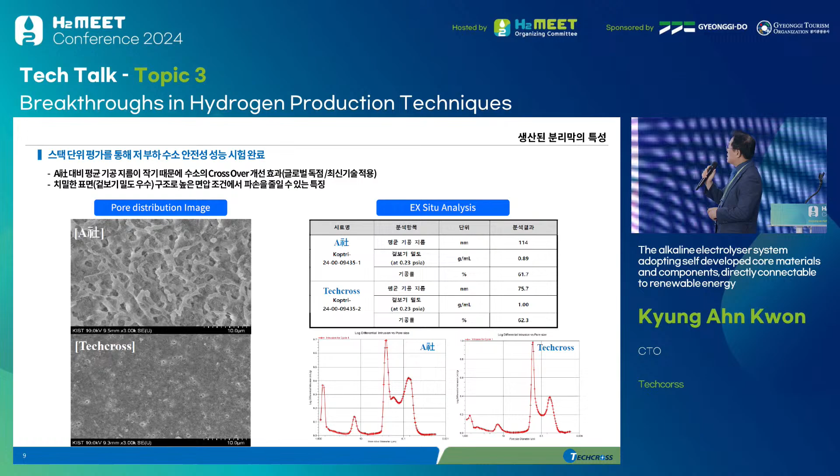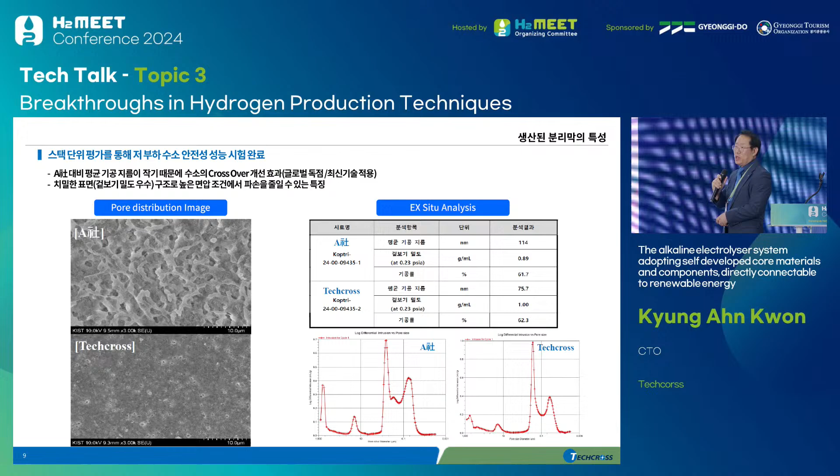만들어진 분리막은 국제적으로 많이 통용되는 A사에 비해서 조직이 치밀하고 평균 기공의 지름이 약 35% 이상 작은 것을 볼 수가 있습니다. A사는 114나노미터인데 우리는 75.7나노미터로서 굉장히 조밀한 상태를 유지하고 있고, 이 기공의 지름 분포도 굉장히 넓게 퍼져 있지 않고 한 군데 좁게끔 산포가 좁은 것을 알 수가 있습니다.

이러한 조밀한 기공 사이즈는 산소 내의 수소 농도를 굉장히 개선할 수 있는 퍼포먼스가 보여지며, 아울러서 효율과 연관이 있는 아이오닉 레지스탄스, 즉 저항도 많이 개선된 걸 볼 수가 있고, 기계적 강도를 나타내는 버블 포인트 역시도 상당한 폭으로 개선이 된 것을 알 수가 있습니다.

이러한 핵심 소재 부품을 활용해서 저희들이 시스템까지 수직 계열화를 하고 있습니다. 현재 수준의 시스템에서 가장 중요한 것은 스택이 되겠습니다. 저희 스택은 다른 회사의 스택들과 다르게 셀 모듈을 단일 셀로 교환할 수 있도록 설계가 되어 있습니다.

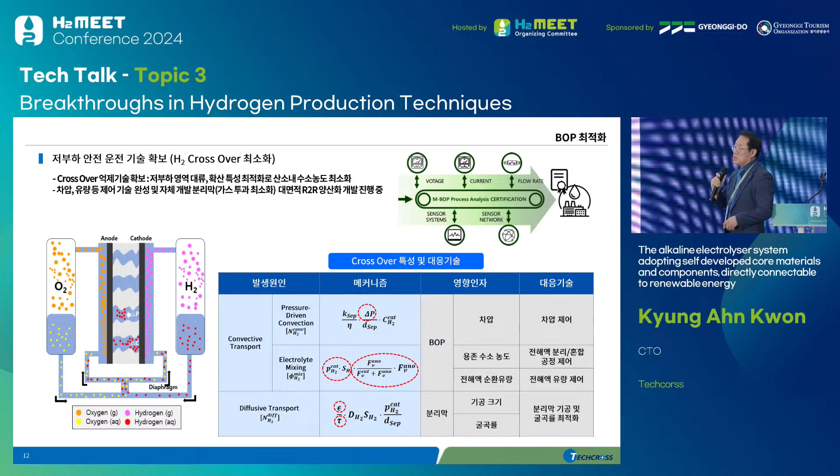이러한 부분들을 제어에 활용해서, 일반적인 차압 시스템으로 갔을 때는 전류량, 부하량을 낮췄을 때 1.46%의 크로스오버 수소량을 보이는데, 테크로스의 복합 제어 로직을 사용하면 약 4분의 1 이하로 이 크로스오버 수소량이 줄어듭니다. 그리고 기존의 차압 방식의 일반적인 제어 방식을 사용하더라도 저희가 자체 개발한 분리막을 적용하면, 분리막만으로도 10%라는 아주 낮은 부하에서 0.65%의 크로스오버라는 아주 우수한 성능을 얻을 수 있었습니다.

이러한 성능을 바탕으로 신재생 에너지에 직결해보자는 아이디어를 추진했고, 공동으로 개발에 참여한 한국의 서부발전 주식회사, 석탄 화력 플랜트를 가지고 있는 서부발전이 보유한 1메가와트급 태양광에 직접 연결해보았습니다.

왼쪽에 보시다시피 100%의 정격 전류를 꾸준하게 보내는 것은 사실 큰 문제가 없습니다. 그러나 점점 저전류로 전류량을 낮추게 돼서 부하를 15%까지 낮출 때, 생산되는 수소의 플로우 레이트가 따라가는 걸 볼 수 있고, 실제 태양광에서 얻어지는 에너지의 파형은 이와 같은데, 밑에 보면 수소가스와 산소가스가 이 태양광에서 얻어지는 전류의 에너지와 함께 똑같이 따라가는 것을 보실 수 있습니다.

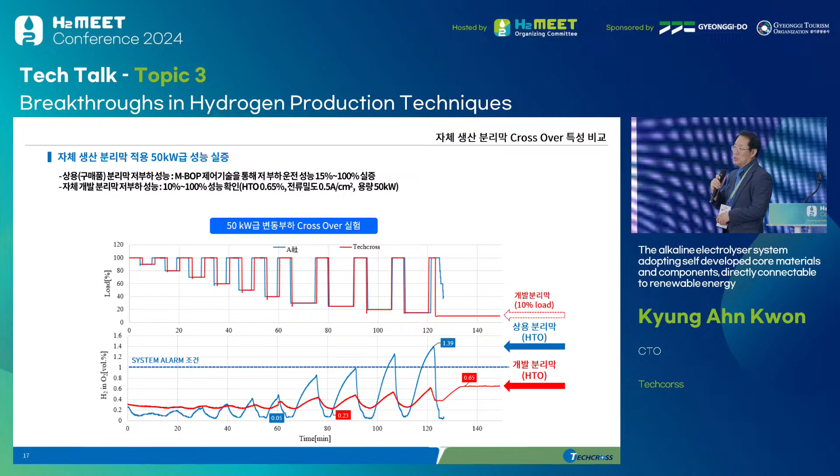테크로스는 앞서 말씀드렸지만 21년부터 그린 수소를 시작했습니다. 얼마 안 되는 기간인데, 올해까지는 태양광 연계 부하 변동 시험을 실증을 성공적으로 완료했고, 내년부터 본격적으로 그리드 밸런싱에 대한 실험을 26년까지 실시할 예정입니다.

이 그리드 밸런싱에는 퓨얼셀까지 같이 연계해서 실제로 그 그리드의 변화량에 따라 수전해의 추종성이 어느 정도의 퍼포먼스를 갖는가를 확인하는 실험이 되겠고, 이게 성공하게 되면 바로 풍력과 태양광에 연결하는데, 저희가 그때까지 2.5메가를 상업화할 예정이라서 2.5메가를 직접 연결할 예정에 있습니다.

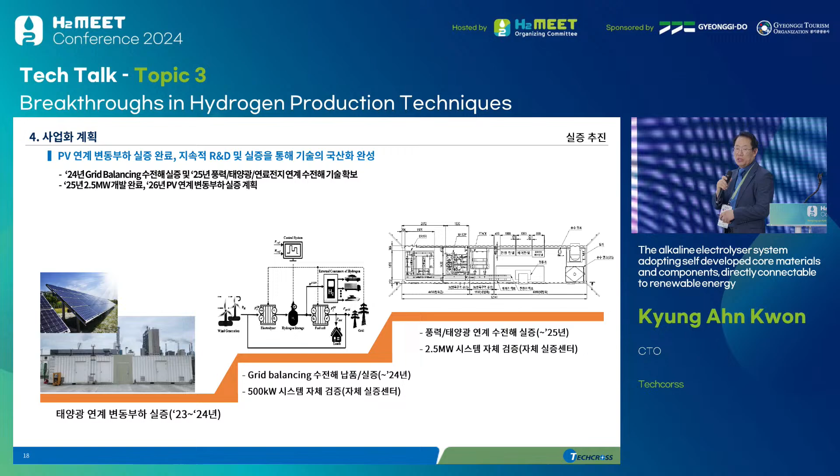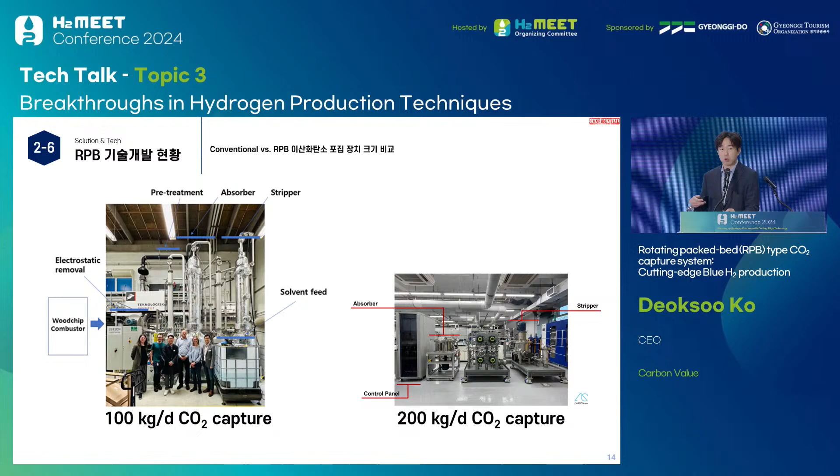직관적으로 좌측에 있는 거는 하루에 한 100kg씩 처리하지만 높이가 한 4m 정도 되는 타워형입니다. 이렇게 굉장히 작은 양을 포집하기 위해서도 굉장히 큰 타워가 필요합니다. 하지만 저희는 그거보다 포집량이 2배임에도 높이는 한 절반, 풋프린트가 훨씬 더 줄어든 설비임을 알 수 있습니다.

이러한 벤치 스케일 타입의 실증을 통해서 기존 컨벤셔널 대비해서 저희가 가설로 세웠던 매스 트랜스퍼 등이 훨씬 더 높아지는 것을 실험적으로 확인했고요. 또한 이산화탄소 가스 농도에 따라서 기존 컨벤셔널 컬럼 타입 대비 얼마나 에너지가 적게 드는지를 모두 실증 완료했습니다. 이러한 벤치 스케일을 바탕으로 현재는 커머셜 스케일로 스케일업을 한 상태입니다.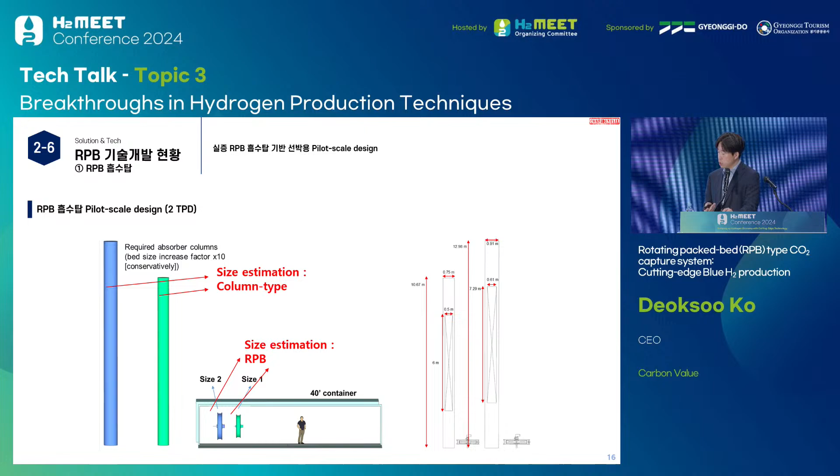현재 상용화된 저희 제품 싱글 유닛은 시간당 약 3,000 노말 루베 정도의 백가스를 처리할 수 있습니다. 이를 기존 타워형으로 구현하려면 아스펜 시뮬레이션상 대략 높이 13m의 굉장히 큰 구조물인데, 저희는 높이 한 2m 정도의 컨테이너 안에 충분히 들어갈 수 있는 싱글 유닛을 개발해서 제작을 진행하고 있습니다. 좌우 폭이 한 12m 정도로 기존 상용화된 컨테이너 안에도 충분히 들어갈 수 있는 사이즈로, 시간당 3,000 입방 정도의 백가스를 처리할 수 있는 설비를 제작 완료하였습니다.

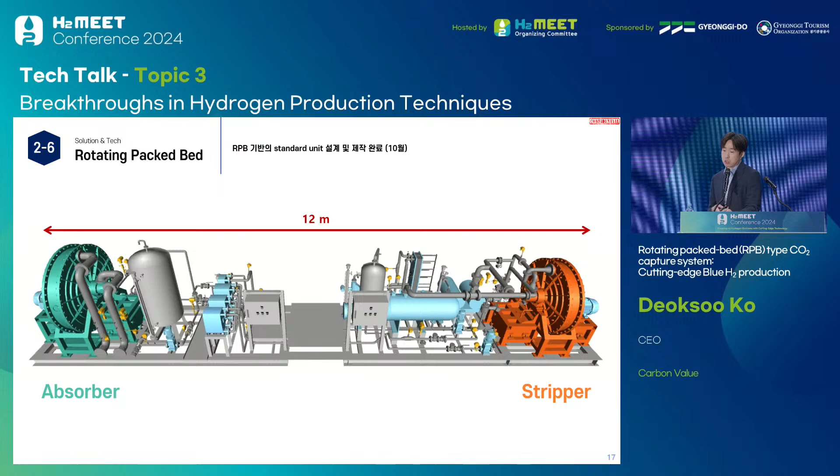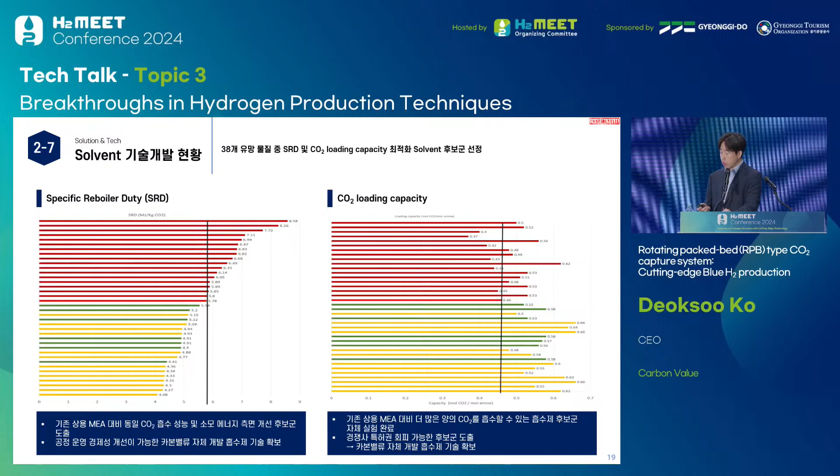저희는 이런 경쟁 기술 대비 훨씬 더 적은 열 에너지, 그리고 훨씬 더 많이 이산화탄소를 포집할 수 있는 솔벤트를 스크리닝하였고, 이 중 기존 타사 대비 특허성을 가지고 있는 녹색의 솔벤트들을 현재 계속 디벨롭하며 특허 포트폴리오를 구축하고 있습니다. 기존 상용화된 MEA 30% 대비 열 에너지가 훨씬 더 적게 들어가는 것을 알 수 있습니다.

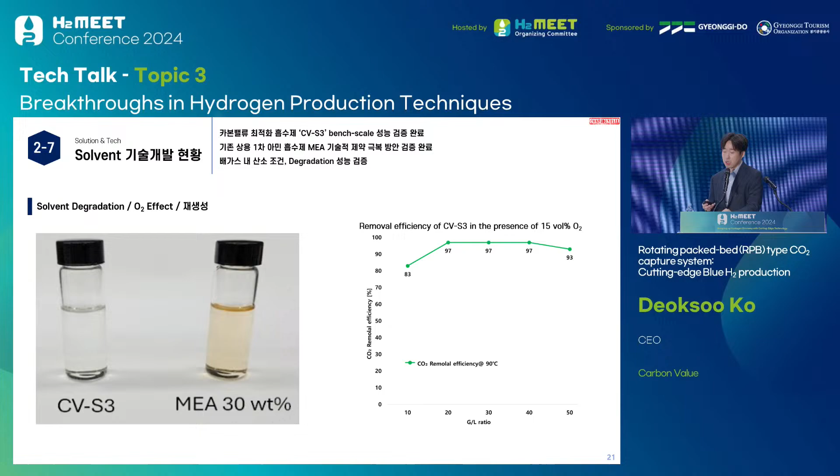이산화탄소 솔벤트에서의 열 에너지 외에도 산소 등과 반응하면서 디그레데이션이 빨리 일어나는 문제가 있습니다. 저희가 개발하고 있는 카본 밸류 솔벤트 3 라인업의 경우 산소에 대해서도 훨씬 더 강건성을 보이는 것을 롱텀 테스트를 통해 확인하고 있습니다.

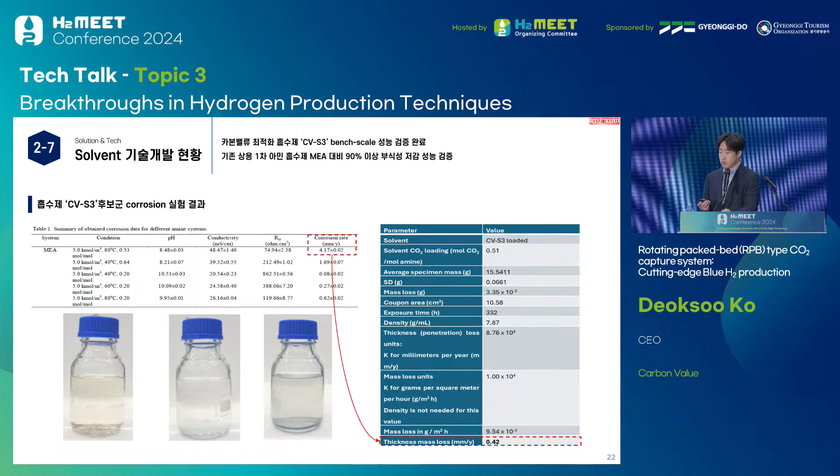저희의 비즈니스 모델은 아까 스키매틱으로 보여드린 장치를 단품으로 납품하는 경우도 있고, 또는 EPC를 저희가 턴키로 수주해서 그 범위 내에서 공급하는 방법도 있습니다. 중장기적으로는 카본 캡처 애즈 어 서비스라고 해서 정수기를 쓰듯이 렌탈 모델로 포인트 오브 소스에서 이산화탄소로 고충이 있는 기업을 찾아가 토탈 솔루션과 스트럭처링까지 진행하는 것을 비즈니스 모델로 삼고 있습니다.

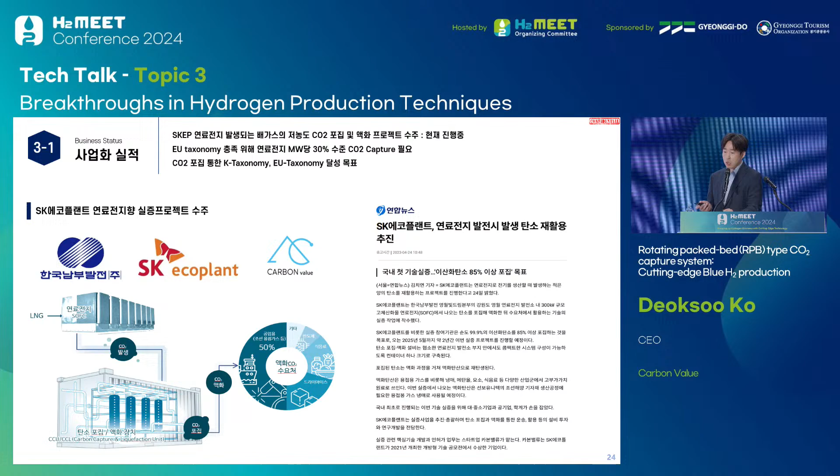저희는 21년 3월 설립된 스타트업임에도 감사하게도 SK 에코플랜트와 남부발전, 그리고 선보 유니텍과 함께 강원도 영월에서 연료전지 백가스에서 나오는 이산화탄소 포집 장치를 현재 실증하고 있습니다. 이러한 연료전지는 내추럴 가스를 써서 발전을 하고 있어 일부 이산화탄소가 발생하는 상황인데, 이를 모두 포집해서 완벽한 친환경 에너지와 텍서너미를 맞출 수 있는 시스템으로 대기업과 함께 실증하고 있습니다.

육상에서의 연료전지 외에도 저희 장치를 가지고 접근할 수 있는 중소형 사이트들이 많이 있습니다. 사람이 음식물을 먹거나 동물의 배출물에서 메탄과 이산화탄소가 나오는데 그런 이산화탄소를 포집하는 바이오가스라던가, 또는 선박이나 해양 플랜트와 같이 풋프린트가 제약이 있는 곳에서 저희가 지금 피저빌리티 스터디를 진행하고 있습니다.

저희 카본 밸류는 원천 설계부터 솔벤트까지 전부 다 국내 유니스트 기술로 전체 밸류 체인을 모두 개발하고 있습니다. 세계적인 기업들하고도 경쟁할 수 있는 원천 기술을 가진 기업으로서 계속 발전해 나가도록 하겠습니다.

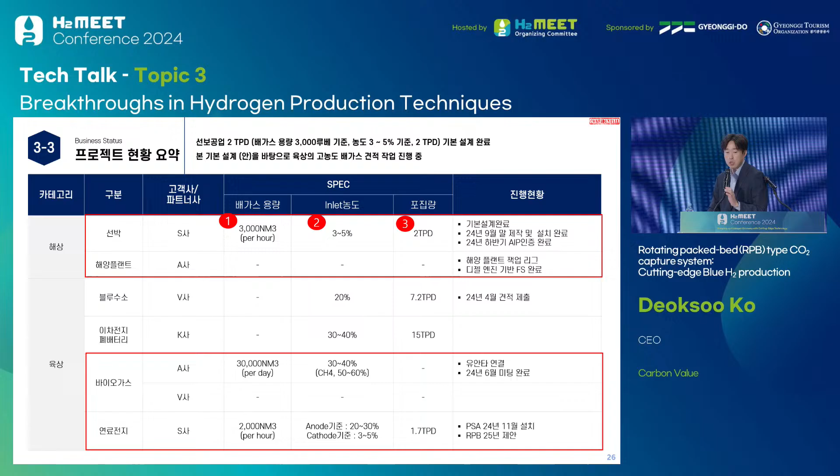경청해 주셔서 감사합니다. 좋은 발표 감사합니다.